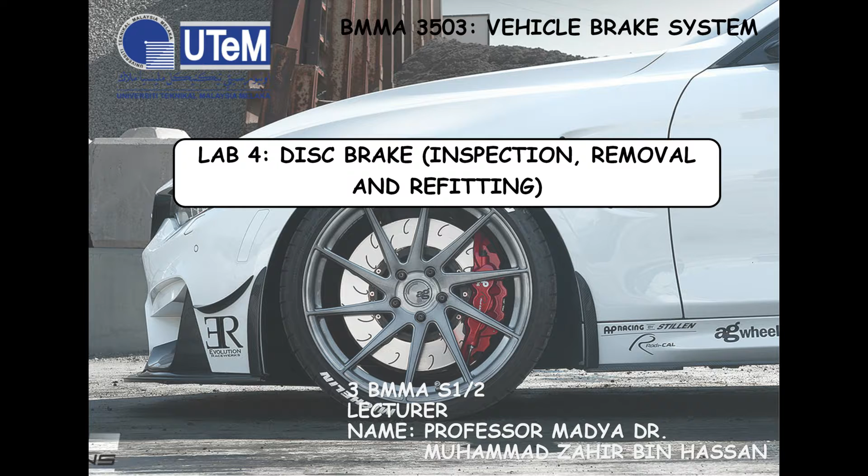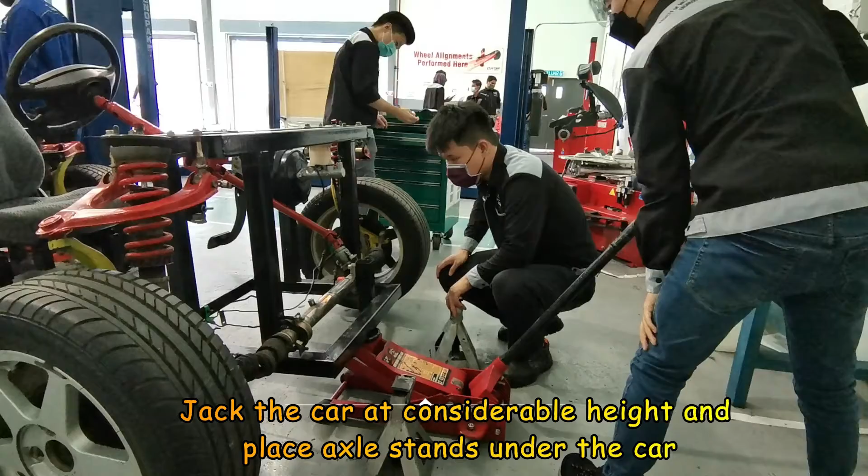My name is Tia Changlom. I would like to explain the work process for this lab experiment. Before we start, we need to jack the car to a considerable height and place axle stands under the car.

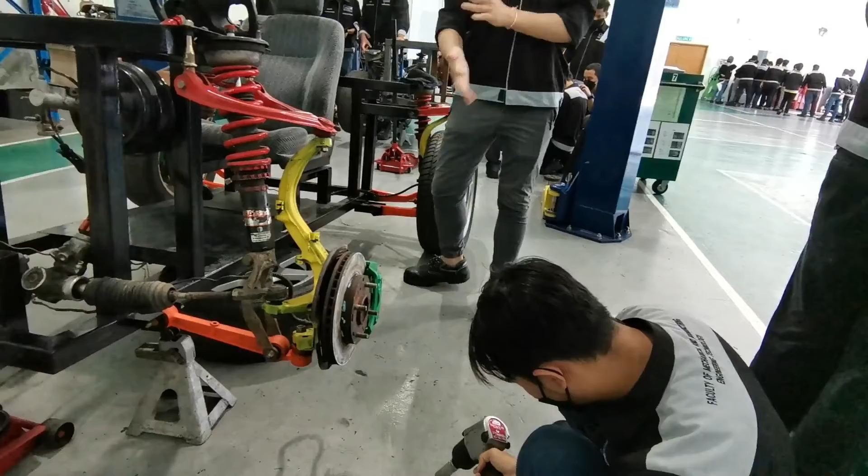We loosen the wheel nuts using the air screwdriver, then take down the tyre and place the tyre under the car. We will see the brake disc, and we use chalk to mark the disc brake surface.

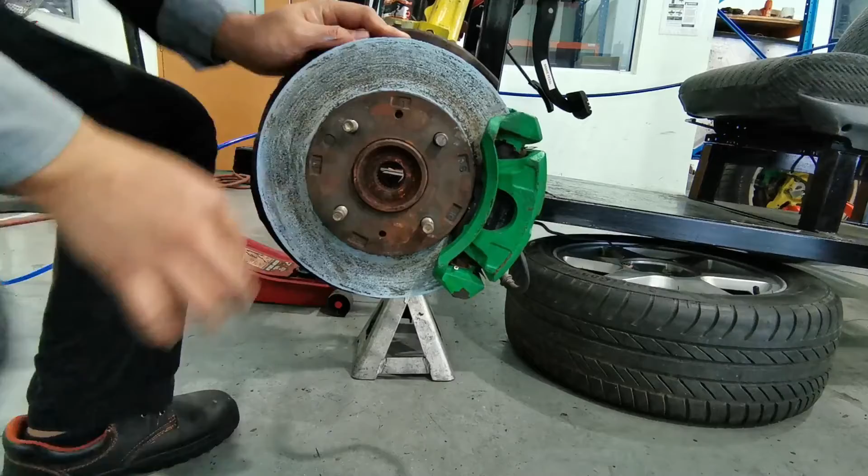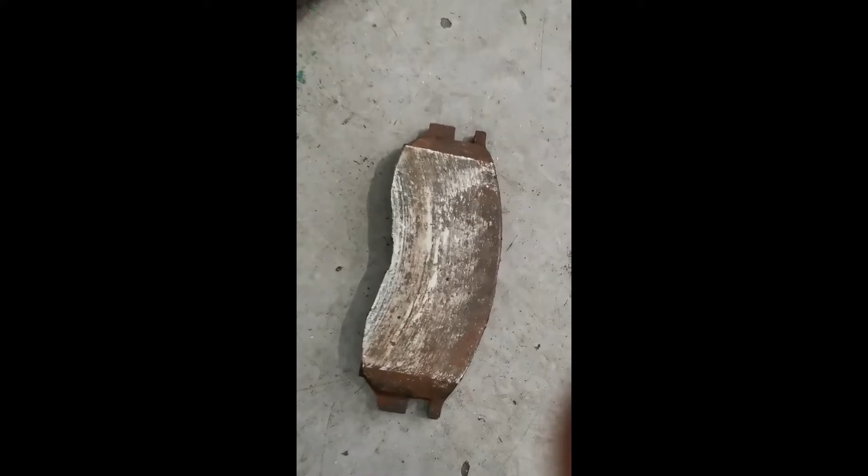After the surface is chalked, we rub it with the brake pad. Then we take down the brake pad to check whether the surface contains chalk or not.

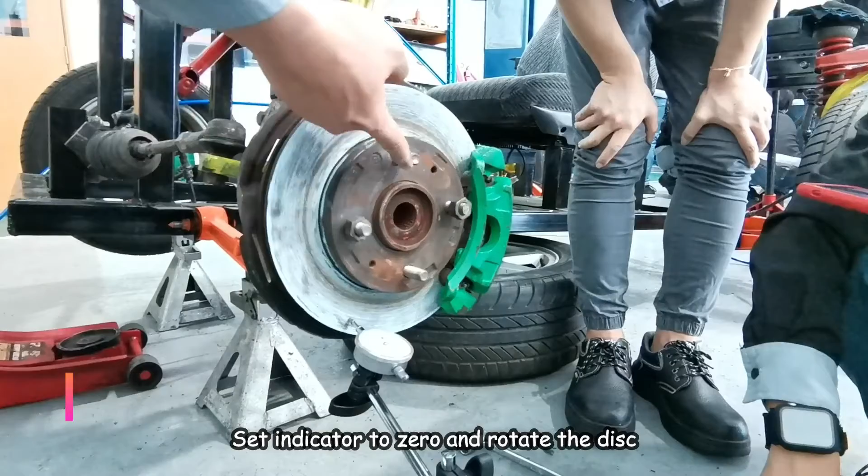Place the indicator plunger at a point 30 mm from the outer edge of the disc. Set the indicator to 0 and rotate the disc. Check whether the brake disc is in good condition.

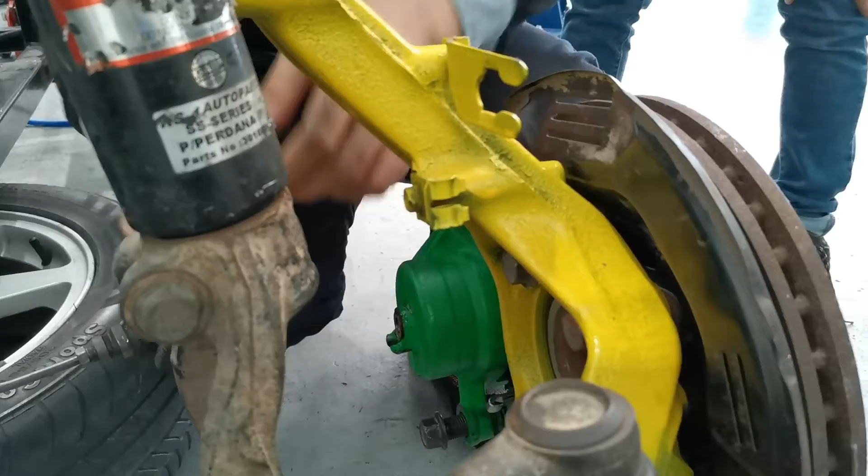After complete rotation, disconnect the brake fluid cable. Open the nut of the cylinder body and take it out.

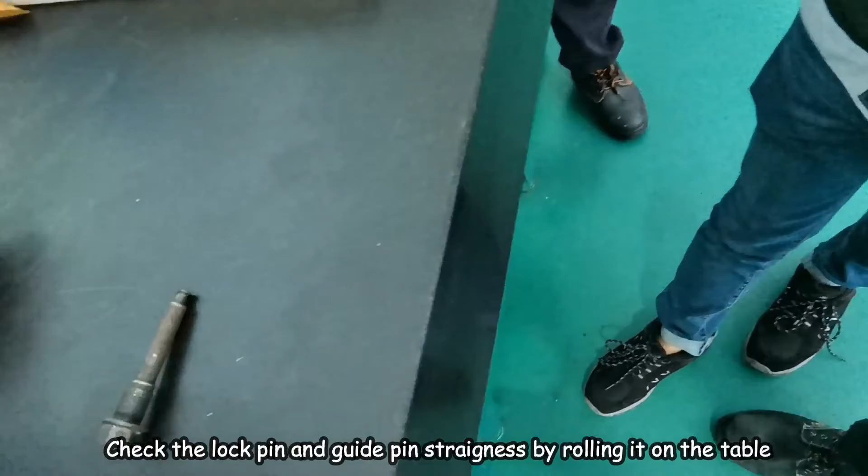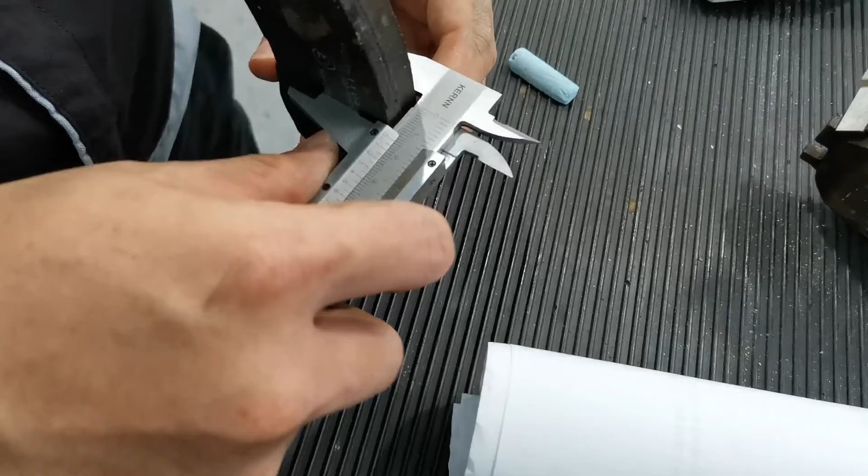Remove the brake disc and check the lock pin and guide pin straightness by rolling it on the table. Take out the outboard brake shoe and measure it, and also measure the inboard brake shoe.

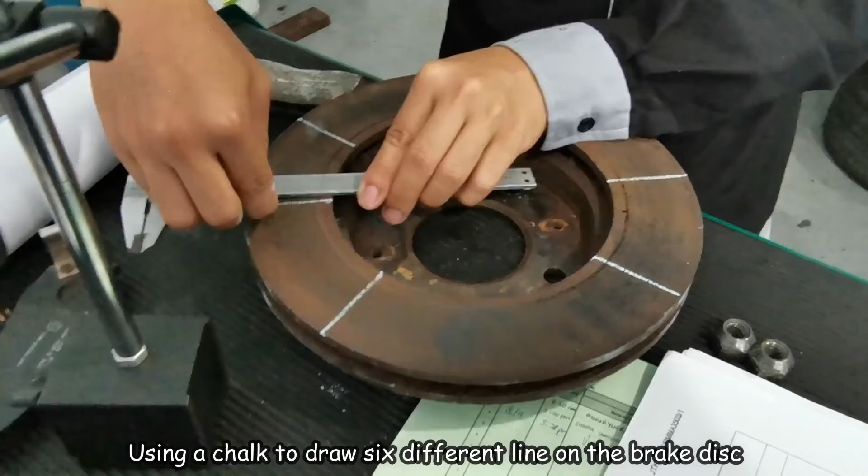Using chalk, draw 6 different lines on the brake disc, and use a vernier caliper to measure the thickness of the brake disc.

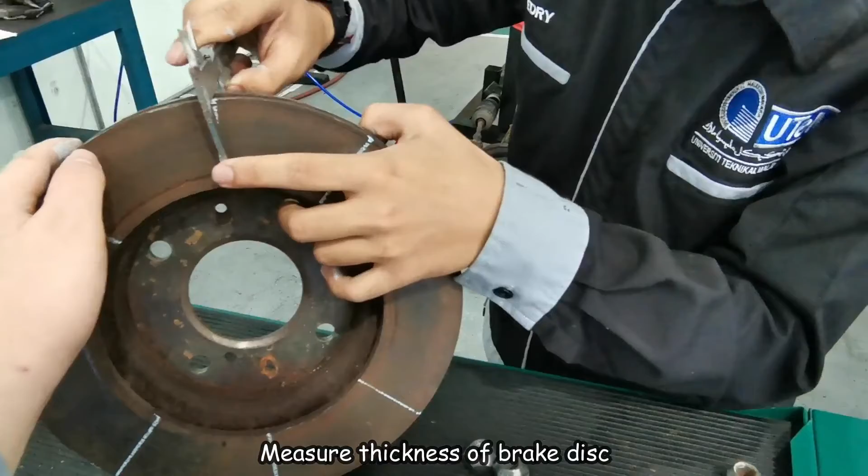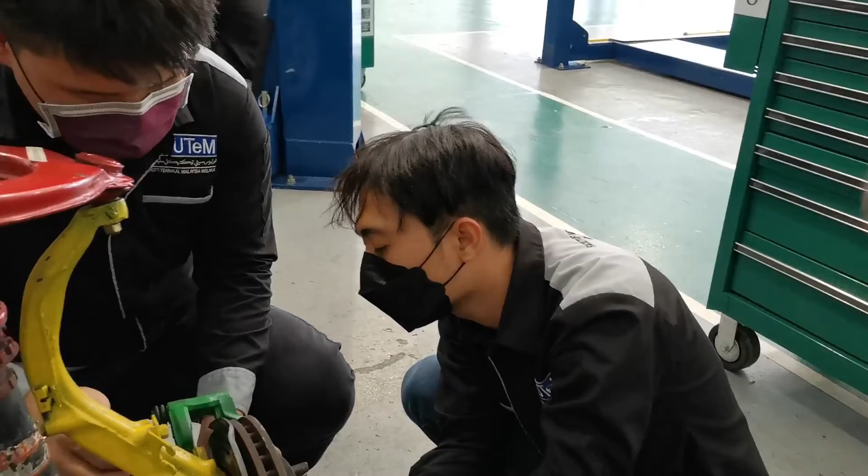After completing all the measurements, we assemble the brake disc and cylinder body, pressing the outboard brake shoe and inboard brake shoe into the cylinder body.

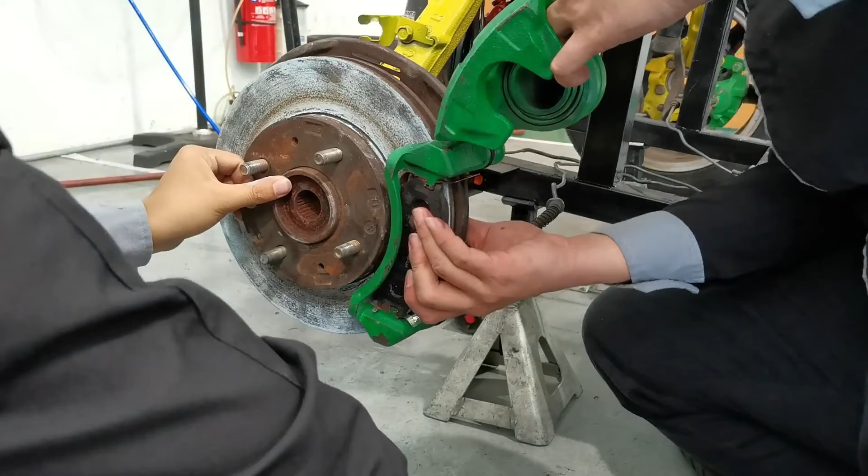Today I'm going to present the questions about the disc brake inspection, removal and refitting in Lab 4. So let's go to the first question: based on your finding, what is the condition of the brake pad? Should it be replaced with a new pad?

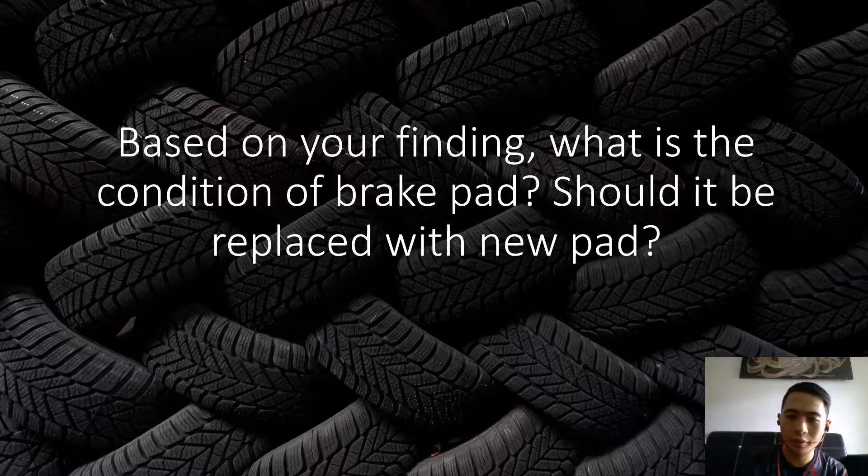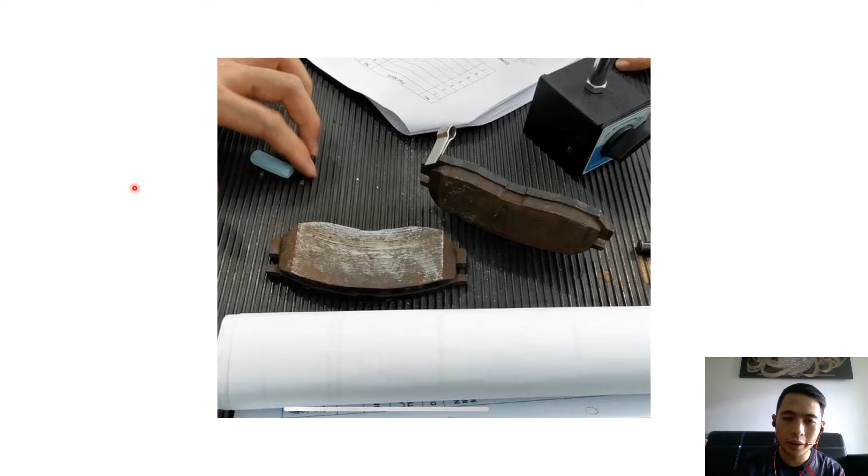This is the image that we captured in Lab 4. As we can inspect, the brake pad is really even. We put chalk on the brake pad and tried to rub it with the disc brake, and there is still an even surface. We also measured the thickness, and the brake pad is still thick enough that it can really be used.

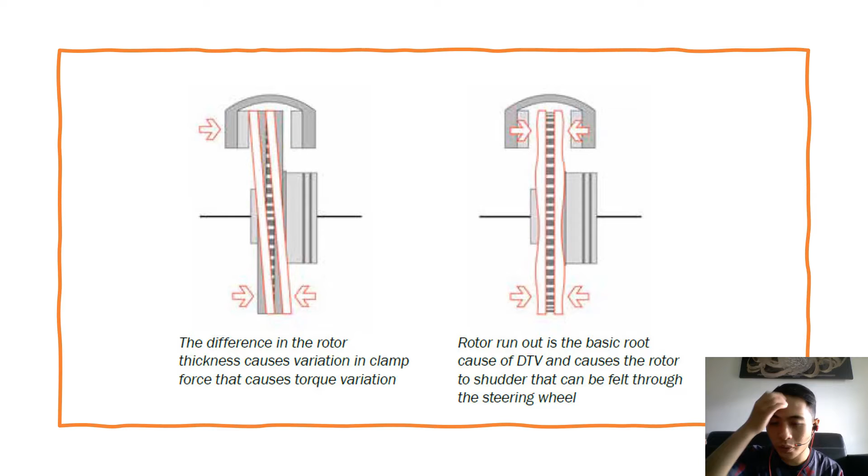So let's go to the next question. List 2 causes of rotor thickness variation. What is the correct repair procedure for thickness variation? This thickness variation we can abbreviate as DTV.

There are 2 causes of thickness variation. The first one causes uneven wear to brake rotors, and the second one is off-brake wear resulting in flat spots or thin sections of the disc.

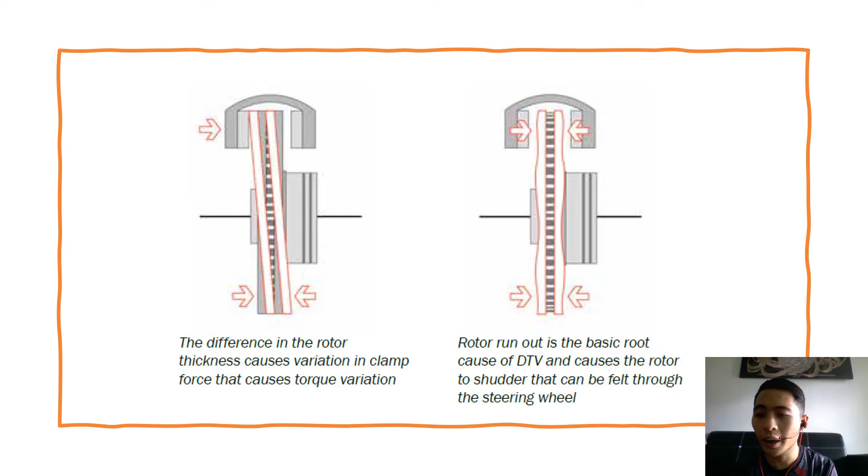What is the correct procedure to repair the thickness variation? The correct procedure is to replace it, or machine it with a light skim to clean up any DTV flat spots. So, the next question.

What do you understand about run-out measurement data? What I understand about run-out measurement data is that it is a measure of how much off-center a brake rotor is as it spins around the hub. The vibration or pulsing in your brake pedal or steering wheel when brakes are applied may indicate that run-out is off tolerance. So in this image is how we're going to measure the run-out data.

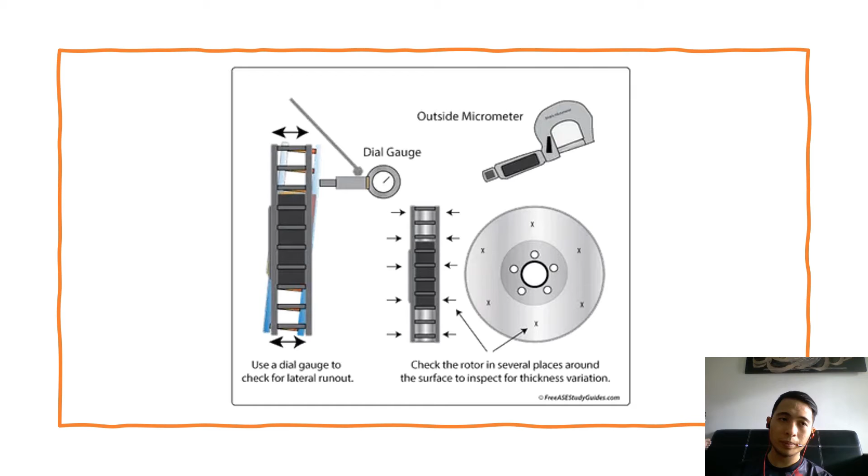This picture describes how we measure the run-out measurement data using this tool in the lab.

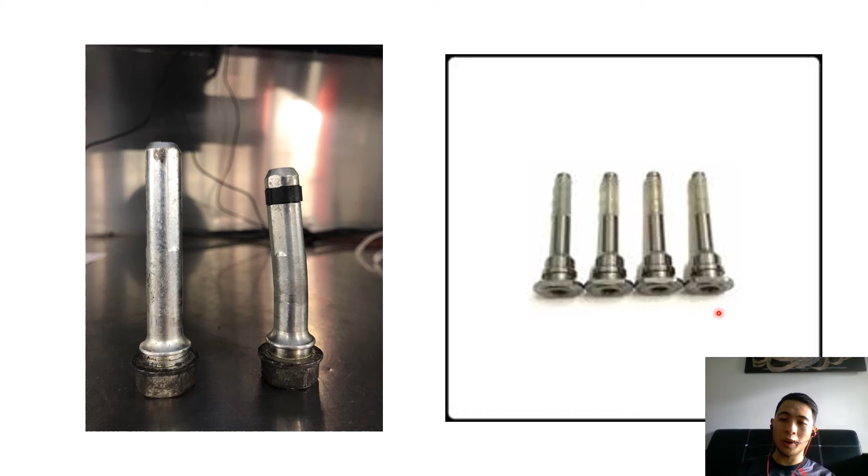The next question is, what is your finding for the lock pin straightness check? What can happen to your disc brake system if the lock pin is not straight? As you can see in this image, there are two types of pins: one with the straight condition, and one that is bent. This one is the perfect condition of the lock pin, or we also can call it the caliper pin.

The proper way to measure the straightness of a lock pin is by using a height gauge. But instead, we just used a flat table and rolled the lock pin 360 degrees to see if it spins. If it stops, then the lock pin is not straight. If it continues spinning through 360 degrees without stopping, then it is straight.

Now, what happens if the lock pin is not straight? The issue that might happen is the brakes could stick or grab when you are driving, or you could hear a grinding noise if the caliper isn't meeting the rotor at the proper angle. So that's all for me today.

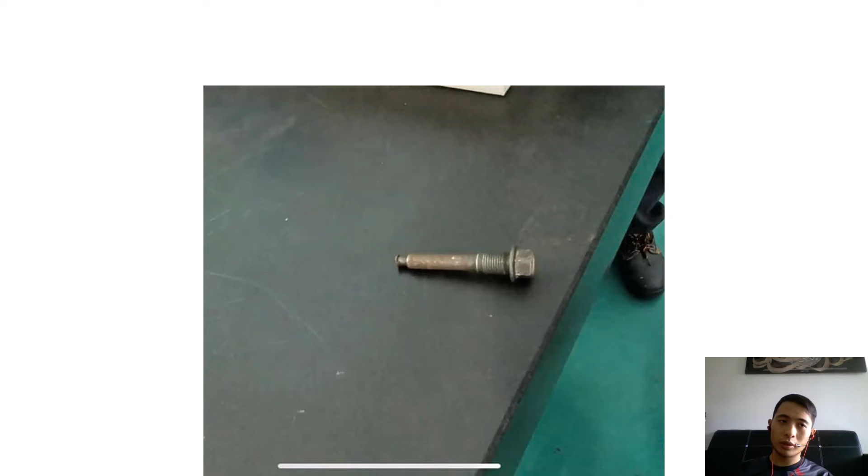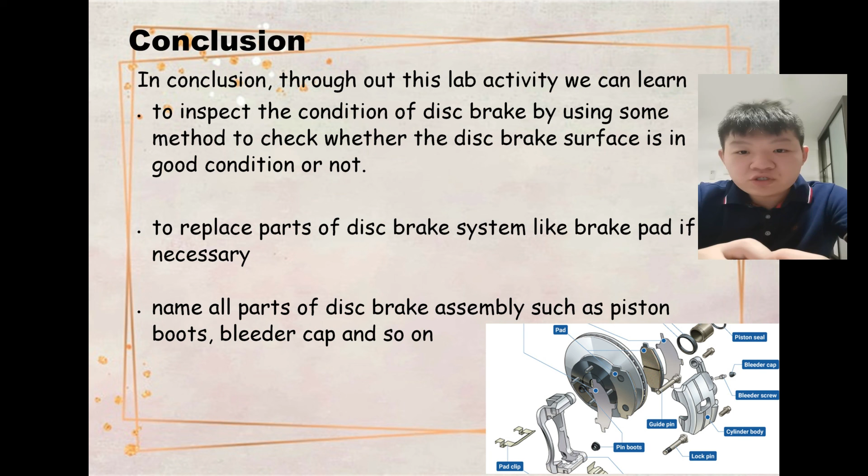In conclusion, throughout this lab activity, we learned to inspect the condition of the brake using various methods to check whether the brake surface is in good condition or not. Besides that, we also learned to replace parts of the brake system, like the brake pad, if necessary. And we learned how to name all parts of disc brake assembly, such as piston boots, bleeder cap, and so on. Thank you.